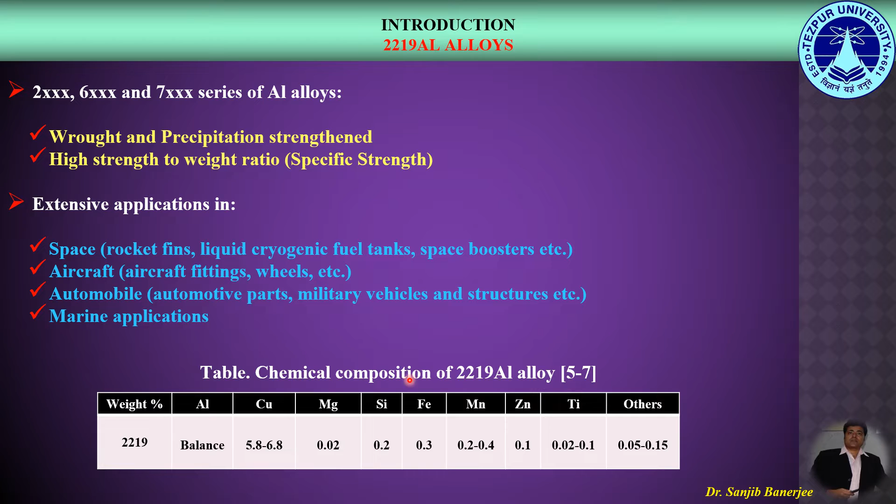2219 aluminum alloy is one of the 2000 series aluminum alloys which have extensive applications in space, aircraft, automobile and marine. Here we can see the standard chemical composition of 2219 aluminum alloys. Regarding microalloying, a recent trend in alloy development is microalloying, where contents would be less than 0.1 weight% with trace elements, in order to achieve higher strength combined with reasonable toughness while maintaining lower density.

The reason behind microalloying is that it permits addition of trace elements, although of higher density, but with lower content, and these trace elements even at lower concentrations may considerably influence the microstructural evolution and enhance the overall mechanical properties without compromising the material weight.

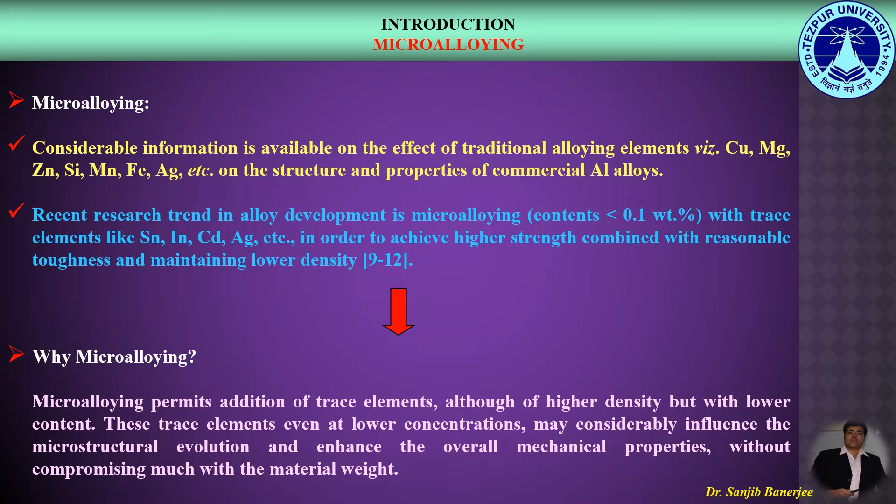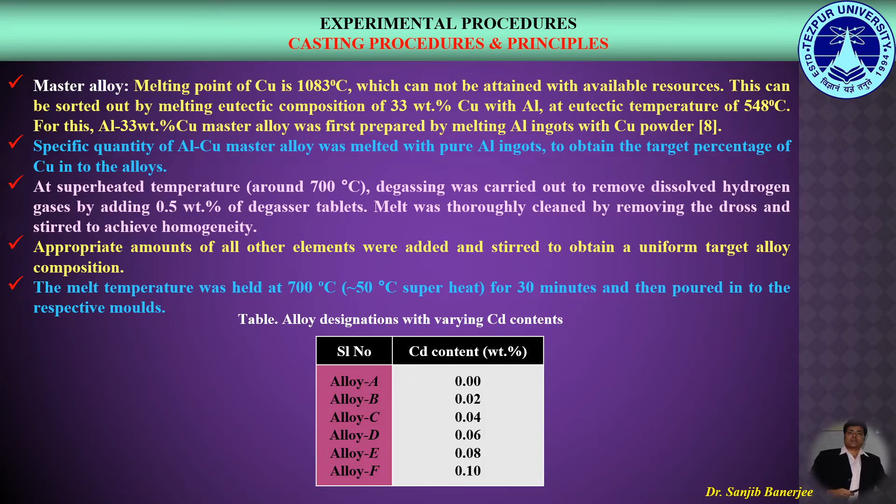In the present work, 2219 aluminum copper alloys were processed by standard casting technique. The alloys were microalloyed with varying contents of cadmium, and the cadmium contents varied from 0 to 0.1 weight% as shown in this table. After casting, the alloys were processed by standard thermomechanical treatment or TMT. The alloys were first solutionized at 525 degrees centigrade. Then they were warm rolled at 200 degrees centigrade.

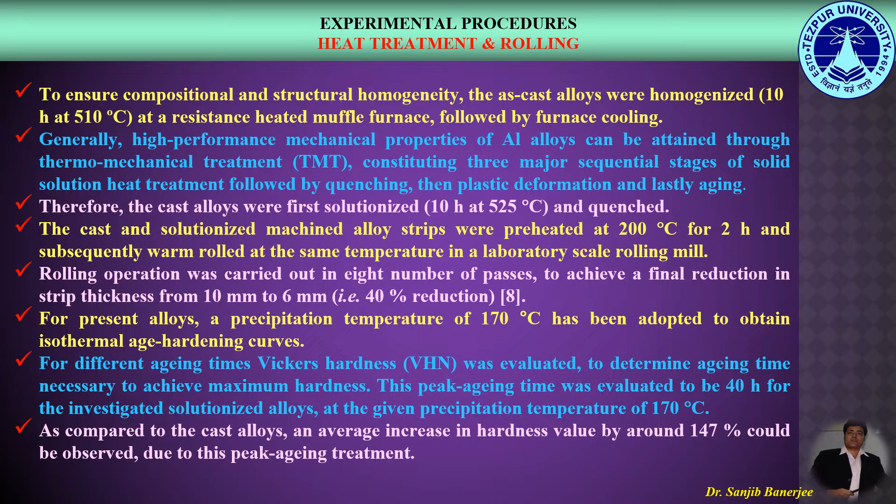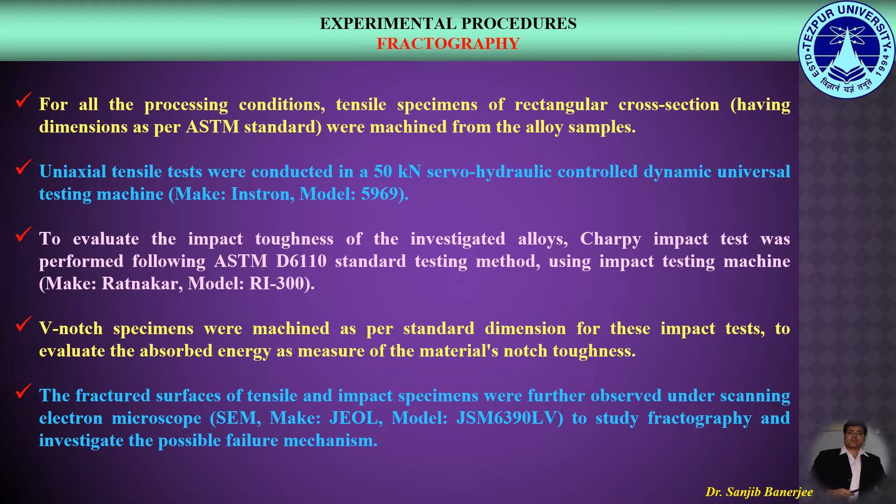And lastly, the alloys were age hardened at a precipitation temperature of 170 degrees centigrade for 40 hours, because the peak aging time was evaluated to be 40 hours for the investigated solutionized alloys. After the thermomechanical treatments, uniaxial tensile tests were conducted. To evaluate the impact toughness, Charpy impact test was also performed following the ASTM standard technique. The fracture surfaces of both tensile and impact specimens were further observed under scanning electron microscope.

Let us study the salient features of the fracture surfaces. Here we can see the tensile fractographs of the cast homogenized alloys with cadmium contents of 0, 0.06 and 0.1 weight%. Here we can see the evidence of microporosities, then the dimples which are the evidence of plastic deformation, then the interface debonding, particle debonding, that is debonding of the particles from the matrix region, then the crack or fracture of the particle itself, then the evidence of micro crack and fracture.

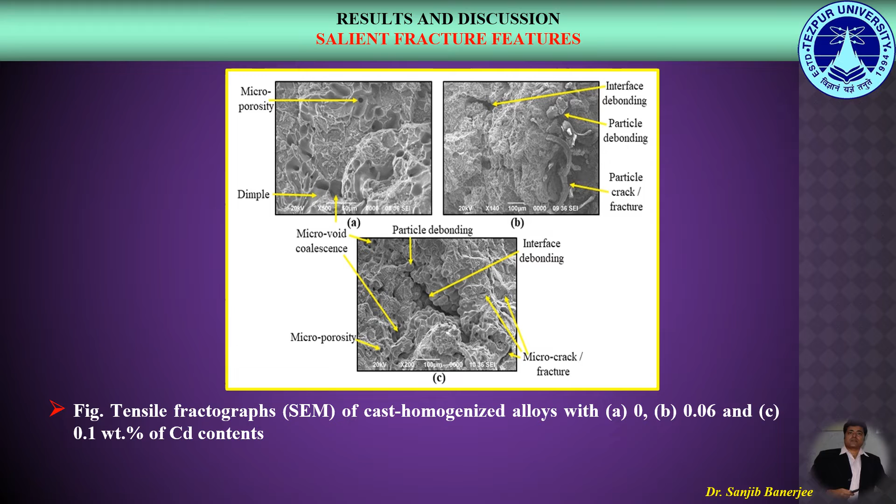As it is evident here, we can see a micro crack, then we can see the coalescence of microvoids in many places. So these are the salient features which can be observed generally in the investigated alloys.

Based on these observations, two possible sites of failure initiation during tensile loading were reported: firstly, the pre-existing microporosities or shrinkage cavities formed during solidification or casting itself, and secondly, the coarse, brittle second phases along grain boundary regions. This theory was supported by the presence of coarse theta phase, chemically CuAl2, and other intermetallic phases detected at the grain boundary regions of the present alloys from SEM micrographs and further from the EDS analysis.

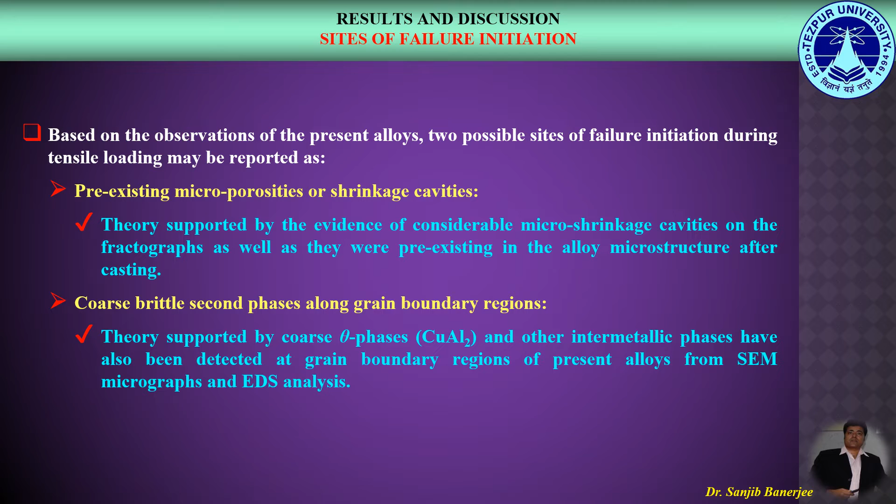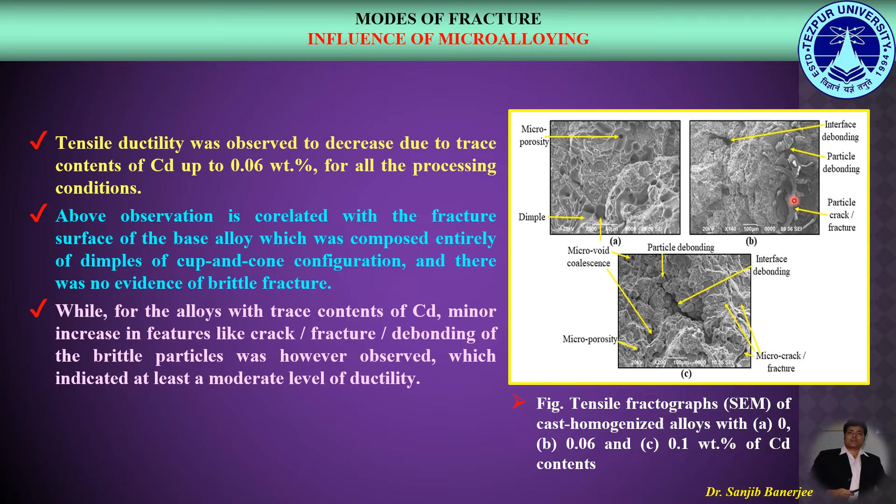While for the alloys with trace contents of cadmium, as we can see in figure B and C, a minor increase in features like crack, fracture, and debonding of the brittle particles was observed, which indicated at least a moderate level of ductility.